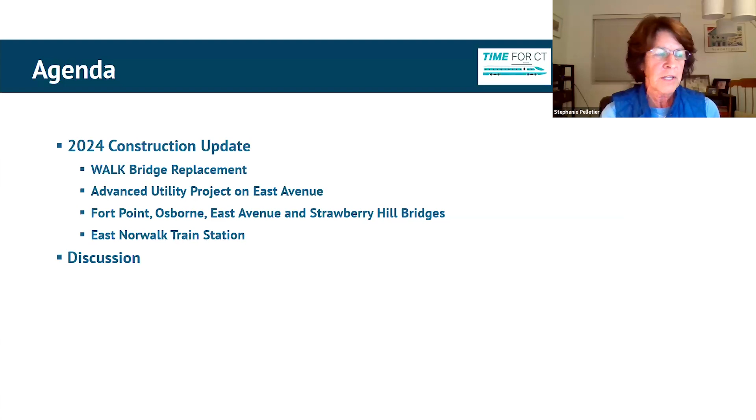So we'll jump right in and talk about our agenda tonight. We're going to talk a bit about the Walk Bridge, our hero project spanning the Norwalk River - the major railroad bridge replacement project. Then we'll touch on things in East Norwalk important to your group tonight, including status on the advanced utility project on East Avenue, progress on the bridges at Fort Point, Osborne Avenue, East Avenue, and the Strawberry Hill Avenue railroad bridges, the attendant roadway work beneath those bridges, and an update on the East Norwalk train station, which is undergoing a major renovation and replacement. Then we'll open up for discussion.

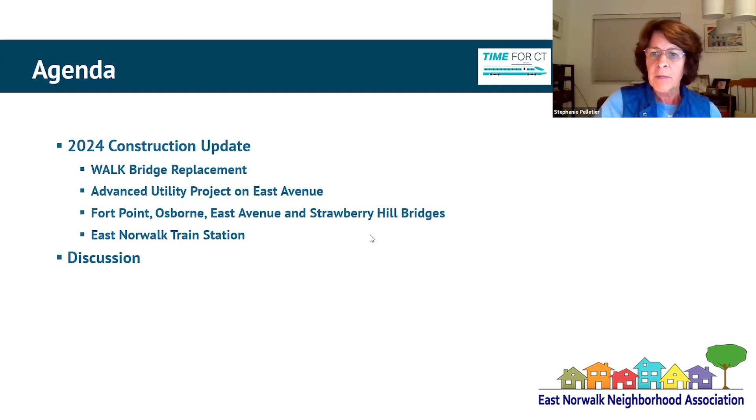Hold your questions if you don't mind, and we can get right into the presentation with Jeff Bird, who's going to take us through an update on the Walk Bridge. Thank you very much, Stephanie, and thank you, East Norwalk Neighborhood Association, for inviting us and allowing us to share an update with the community. This isn't necessarily the meat and potatoes of this particular meeting, but I'd love to give a brief update on the overall replacement project of the Walk Bridge.

As you can see, we have some very recent photos. Work is ongoing in all four corners, basically, of the bridge itself. The nice pictures to the right are taken from the bottom of some of our secant pits - basically, we're tunneling underneath the bridge to relocate some of the overhead wires that are on those high towers you can see on the left. That work is ongoing - the pits have been constructed, and we are currently drilling, or tunneling, underneath the river. Hopefully this week we'll actually place concrete in our first production drill shaft for the new bridge.

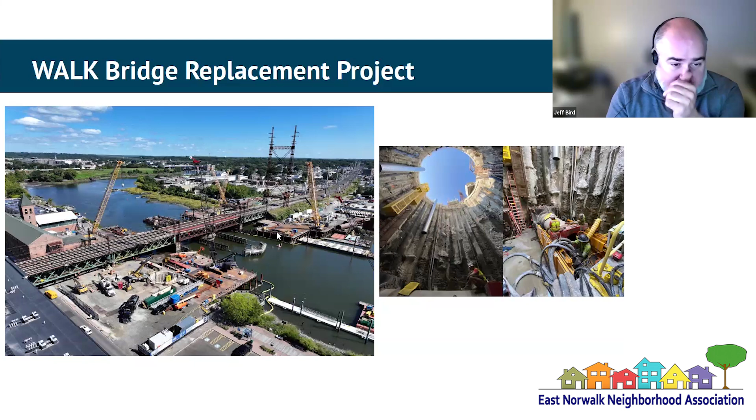So that's exciting - if you could pop to the next screen, Steph. You've probably seen this, but this is a quick, high-level update of where we're at in the overall life of the Walk Bridge project. Obviously we're in 2024, and we are continuing the microtunneling. We are constructing the piers, the substructure of the new bridge, as well as mobilizing and preparing at the Manresa site down on Manresa Island. Next year will pretty much be a continuation of what we're working on right now. I know we're not taking questions at this time, but if you do have any, you know where to reach us.

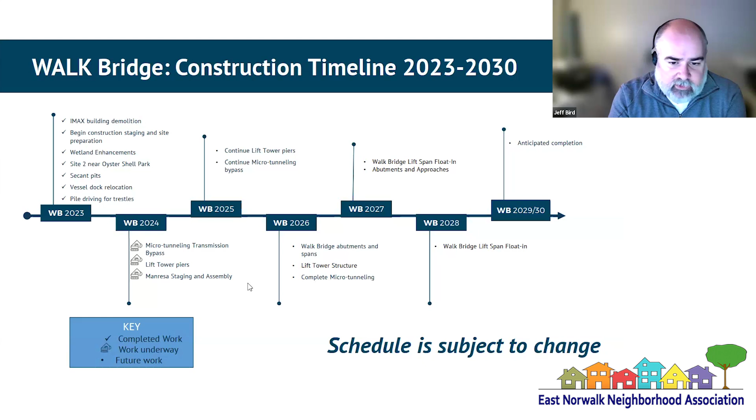And I believe at this point, I'll be turning it over to Emilio to talk about the Advanced Utility Project.

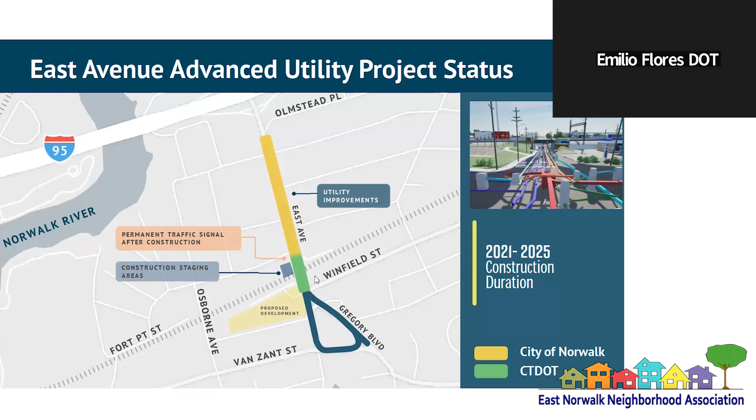Speaking to the detours, Frontier is actually going to be closing the section of East Ave between Fort Point and Winfield from the 2nd to the 12th. We are going to use a detour that we've utilized several times in the past with minimal impact. The station will remain open and pedestrian service will be maintained.

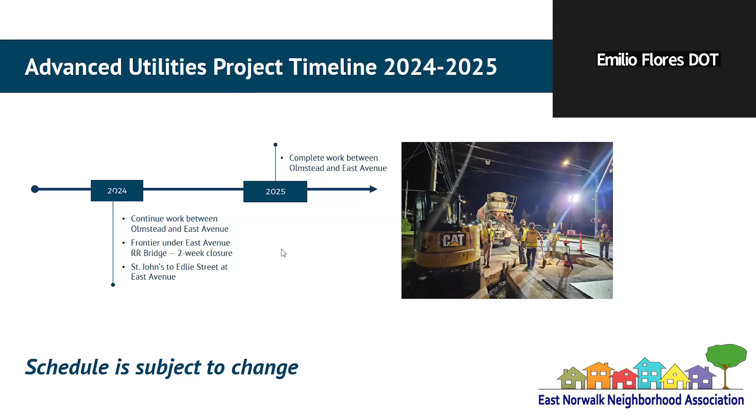In response to some of the residents' concerns, we will be minimizing our use of full closures at night, and we're going to start using alternating one-way traffic. You guys may have already seen the impacts of that, but please, we're welcome to your feedback on how that's working out. Just one of the ways in which we respond to your concerns.

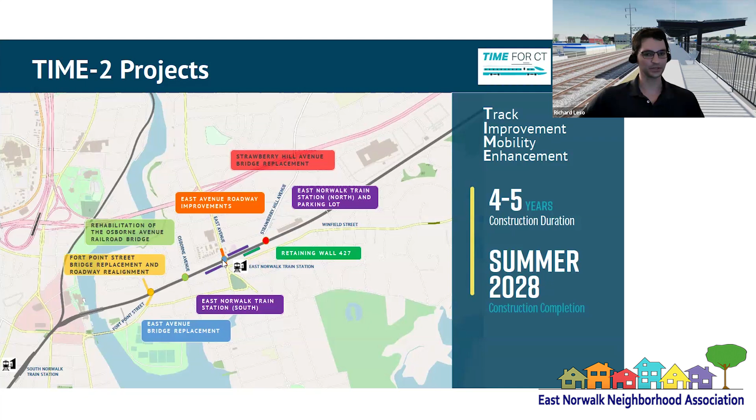So to date, we've accomplished the demolition of the north half of the railroad bridge over Osborne Avenue, and we've also demolished the north half of the railroad bridge over East Avenue. You've probably noticed we've also demolished the north platform at East Norwalk Station.

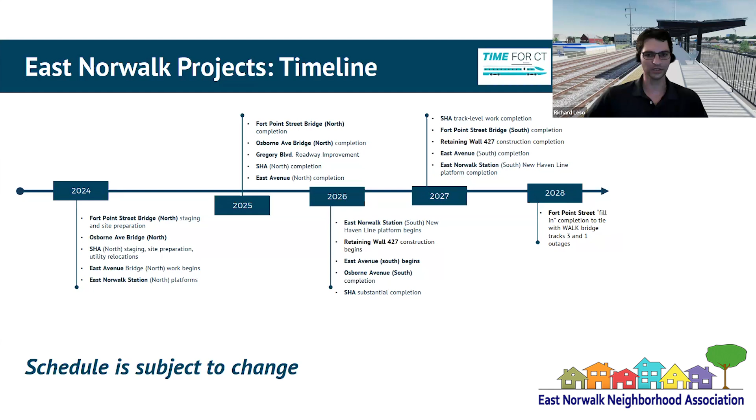On that note, we sincerely appreciate the community's patience as we did that. It took a lot of effort and coordination to ensure that we could get the proposed work completed in a tight 3-week closure window. The team here takes a lot of pride in the fact that we're able to accomplish that, and we really hope that some of the efforts we implemented during that 3-week closure helped alleviate some of the impacts to the public, such as the commuter shuttle.

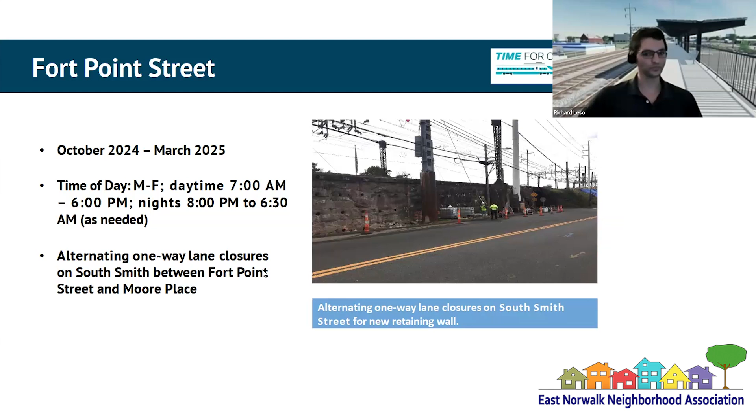So as promised, now I'll get into some of the work occurring at each of the locations in the next year or so. If you're subscribed to our construction alerts, you may have observed traffic impacts on the north side of the railroad bridge over Fort Point Street, with alternating one-way closures at night. These are expected to continue through early 2025, related to construction of the new bridge over the rail and Fort Point Street. Later in 2025, around May, there will be more nighttime closures for underground utility work at that location. We can move on to Osborne.

You've likely noted that Osborne Avenue under the railroad bridge is currently closed to vehicular traffic. That closure is expected to remain until spring of 2025, at which point it will reopen. It's expected to close again in spring of 2026 to allow for replacement of the south side of the bridge. The second closure is expected to be shorter, lasting about 5 months. During all these closures, property access and safe passage of pedestrians is maintained via our pedestrian enclosure, pictured here on screen.

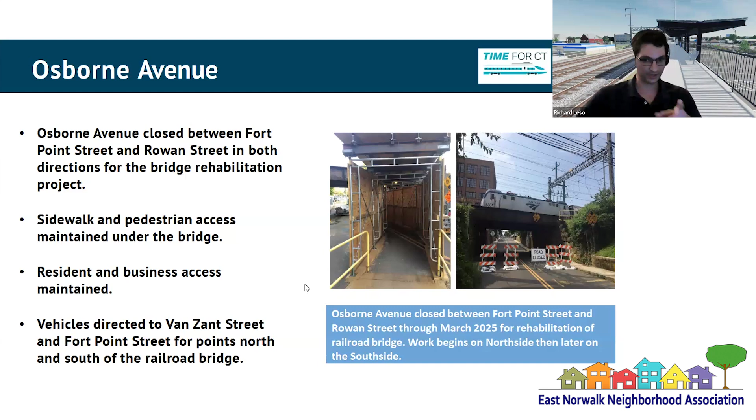Moving on to Strawberry Hill Avenue. The closure of Strawberry Hill Avenue under the railroad bridge was approved at the Norwalk Traffic Authority's September 16th meeting. We have 2 closures planned. The first will begin in January and last until fall of 2025. The second closure is expected in summer of 2026. Just like at Osborne Avenue, the first closure will replace the north half of the bridge, and the second closure in summer 2026 will replace the south half.

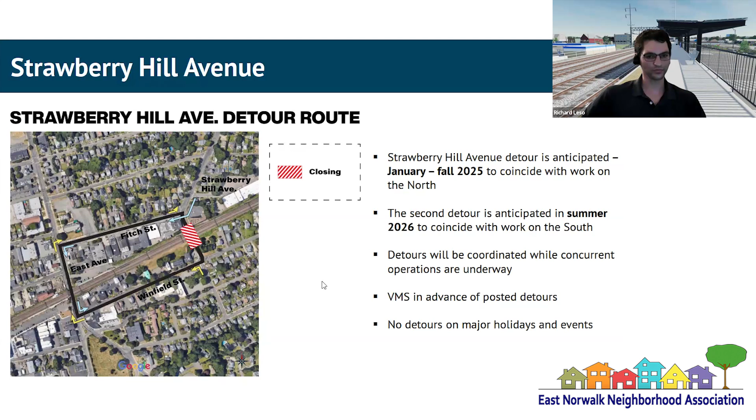Moving on to East Norwalk Station, as mentioned previously, we've demolished the north platform and set up the construction staging area. Some existing parking stalls at the station are currently being utilized for construction. Commuters are directed to park at the additional parking lot constructed at 180 East Avenue. At this point, we've completed 2 of the anticipated 4 total 3-week closures at East Norwalk Station.

The next 3-week closure is scheduled for fall of 2025. Upon completion of that closure, the new platform is expected to be open to the public. Then we'll have one final 3-week closure scheduled in 2027. We expect the inconvenience mitigated as it was during the first 2 closures, so at this time, we fully expect to continue our partnership with the city and continue running the commuter shuttle.

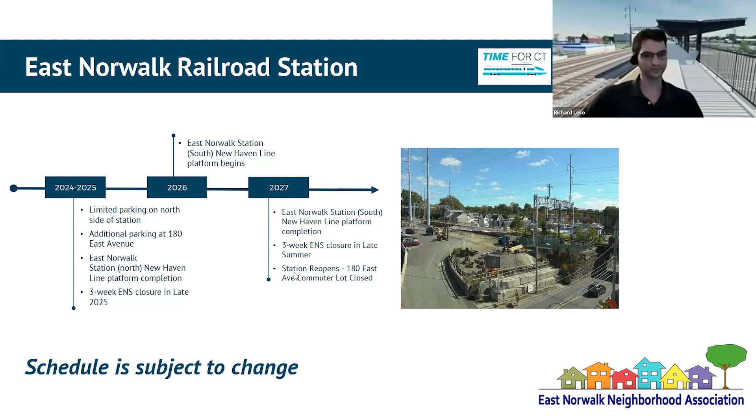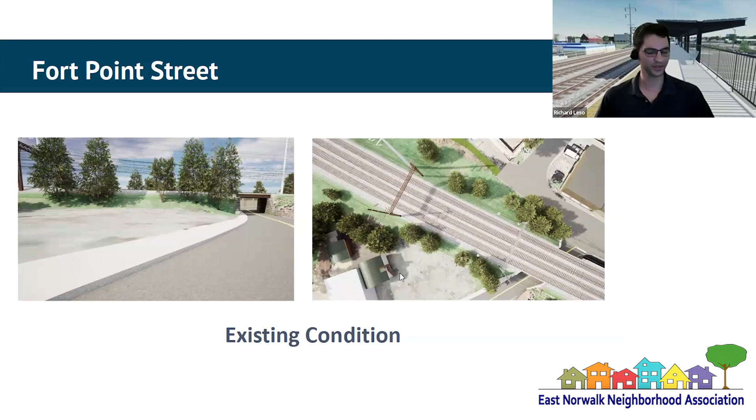And then I see here we've added some before and after renderings created for the project. Here you see Fort Point Street. We have the existing condition, which you've all grown very familiar with. When we're completed, Fort Point Street will be realigned and widened. The existing bridge will be relocated - I'm sorry, the proposed bridge will be relocated to the west of the existing bridge, such that it will align with South Smith Street.

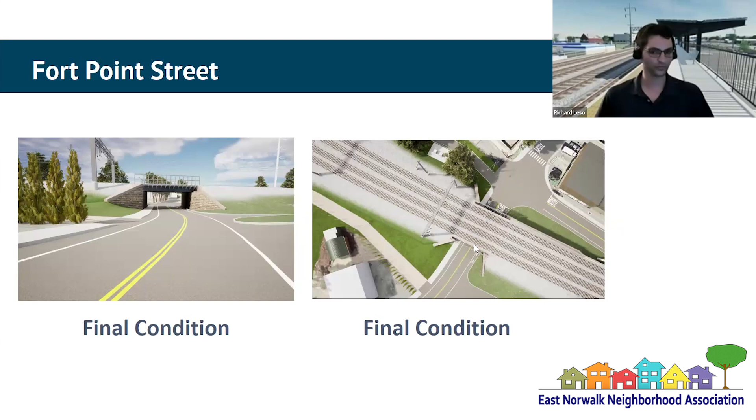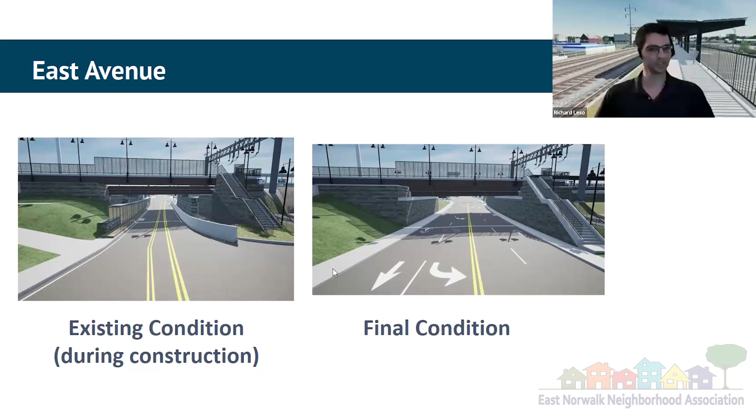And here you see our existing condition at East Avenue, juxtaposed with our final condition at East Avenue. You'll notice the roadway is widened to the station platforms. It's improved. And then you'll see some of our final East Avenue roadway improvements, what we expect it to look like at the end of our project.

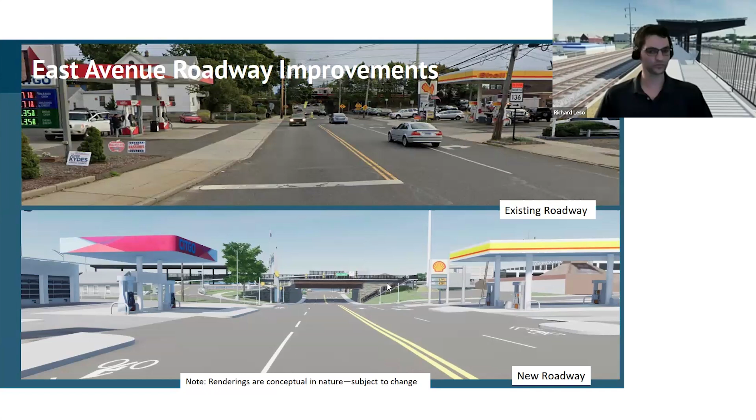And some more photos for the East Avenue Bridge, which was pictured in the East Norwalk station rendering. Here you see our final condition at East Avenue. Again, the street will be widened, with better accommodations for bicycle traffic and pedestrians, with sidewalks on each side of the bridge. Each sidewalk will be wider than the existing sidewalk.

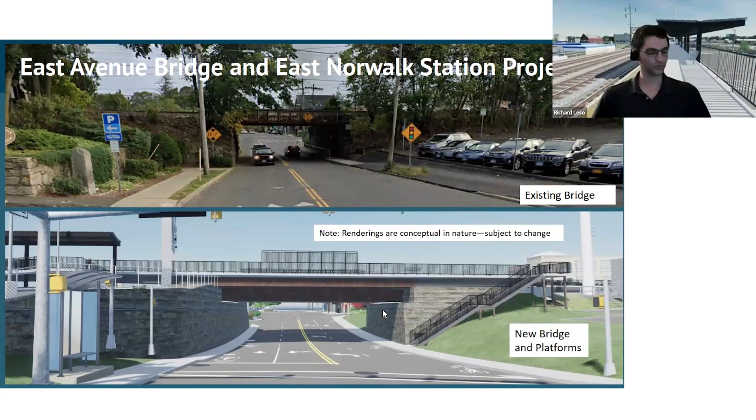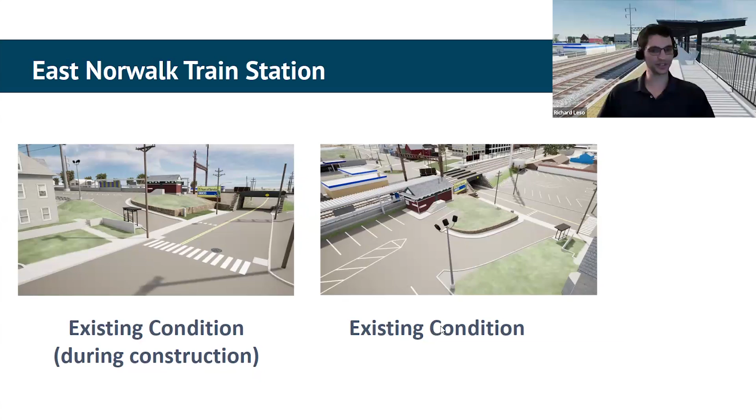And some more renderings for East Norwalk train station. You see our existing condition, which again you all know very well, and the proposed final condition. You'll notice on the north side of the platform we have what I believe we call the kiss and wave lane, a good place to drop off passengers. You see our improved ADA accommodations, with ADA compliant ramps. The new platform will be heated, and the covering over the platform is increased to keep passengers out of the rain.

And again, some more photographs of the final condition.

With the platforms being longer as well to accommodate platforming of the train cars. Good point, Stephanie. It's an existing 4-car platform to be increased to a 6-car platform.

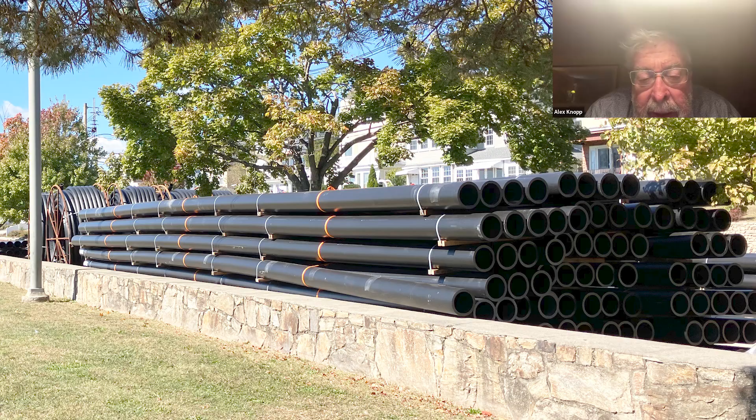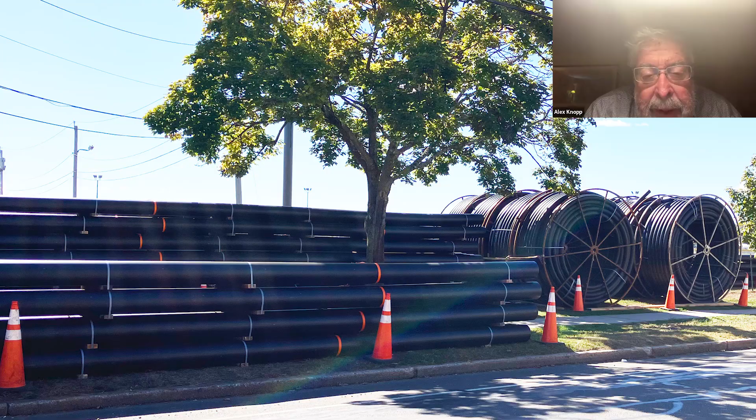One of the problems we have in East Norwalk is that there's a lot of work going on and very few entrance, access, and exit points. Could you discuss your coordination with the city, DPW, and other departments to make sure that the routes you leave open aren't being closed at the same time by projects from other departments in the city? I'm particularly concerned about the sewer project on Seaview Avenue. If you drive on Seaview now, you'll see the entire length of it has a series of plastic tubes and pipes along the whole length of Vets Park. So when those start being installed, what happens to overall traffic mobility within East Norwalk from the impact of all these projects being done simultaneously?

And I'll add to RJ, could you address in the same thing too, the issue of Eversource utility, because I know that's not part of your project, but it's also impacting Seaview. So maybe get both of those.

Let's talk about the coordination with the city. RJ or Amelia, do you want to chime in on that? Sure, I can touch on that. We meet with the city weekly at a minimum. We discuss the traffic impacts, the proposed detours. All of our detour plans are reviewed by the city. And we meet with them weekly where we discuss other projects that may not be on our radar, projects that aren't administered by us, city projects.

Like I heard you reference a sewer project, I can't comment specifically on that because we're not involved with it, but the city does oversee all the closures, and their goal, not to speak for the city, is to ensure mobility through East Norwalk despite all the construction work happening. I have to say, as former mayor of Norwalk, I'm not satisfied that mobility is being maintained. The same thing happened when the bridge burned and collapsed over I-95 - the rerouting of traffic after that first day was horrible.

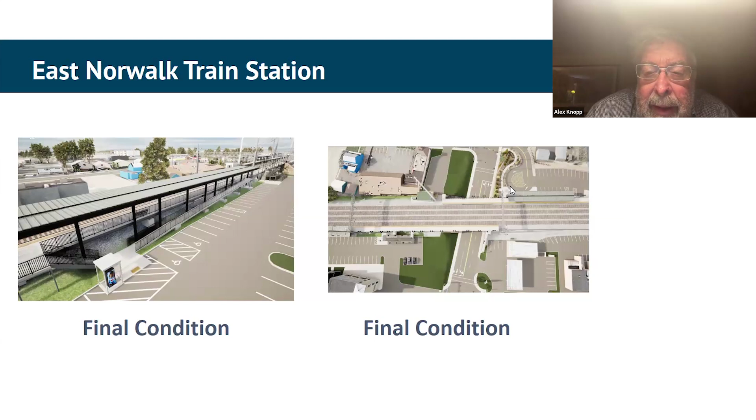Now, my second question is, will there be a realignment between the exit from the East Norwalk station and the temporary construction lot that you have on the other side of East Avenue? When I was mayor, we had talked about trying to align Fort Point and the exit from the East Norwalk station, perhaps with a light, to make sure there wasn't this odd jiggering going on. Could you discuss that, please?

Amelia, do you want to take this one? That work is happening under Amelia's project, under the purview of the Advanced Utility Project, Mr. Knopp. And we stole your idea. We are, in fact, aligning Fort Point with the entrance to what used to be the White House there that's owned by TTD.

So that driveway will come out through there. And not only will there be signalization there, that signalization will work in conjunction with the other signals on Fort Point, acting as one big computer, one big traffic analysis as the cars are coming and going through that intersection. No, that's great to hear.

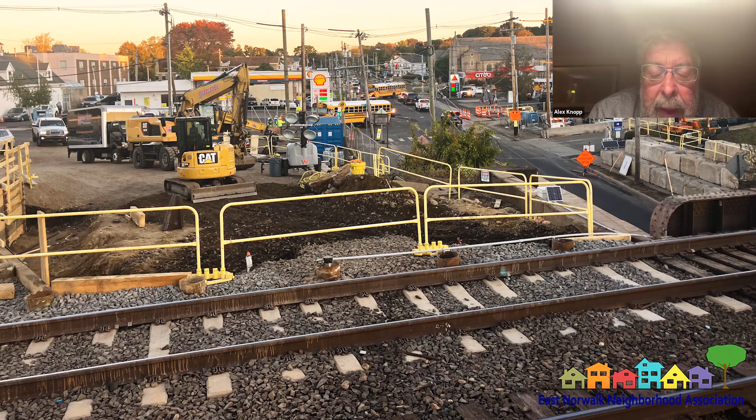Great. Significant improvement. And my last question is, what's going to be the long-term use of the temporary construction lot that you have at the East Avenue Bridge on the north side?

Commuter parking, I believe. Yes. Right. Yep. Will it be part of the East Norwalk train parking lot kind of complex? That's my understanding right now. I can't speak to whether that's finalized. That's our intention at this point in time.

Good, thank you. Thanks very much. Thank you, Diane. Welcome. Thanks, Alex. Then to chat. Okay, Charles? Yes, Becca had a few questions in there, but it's best she speaks to them herself because she had more questions to ask. So I'm going to ask her to unmute. Hi, Becca. Hi.

My first question actually dovetails pretty well with Mr. Knopp's, because I'm wondering the same thing about how the construction projects can better accommodate the continued flow of pedestrian and bicycle traffic. For example, on Seaview, where Mr. Knopp mentioned, it's really treacherous coming over the drawbridge right now with the bike lane shift when there's that big hole in the ground. I mentioned specifically in the chat that walking that temporary sidewalk or protected sidewalk under the current East Avenue bridge is pretty treacherous at night during construction. As someone who frequently commutes off peak and arrives back after dark, that's a great concern to me because sometimes trains that arrive after midnight from New York come in on the northbound side, and those of us who live or park on the southbound side need to get back over there safely.

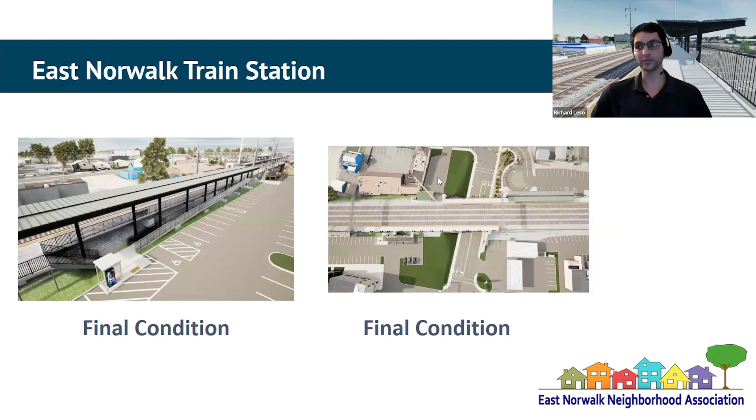So for your first question, for a dedicated bike lane, no. You probably noticed in the rendering there are proposed sharrows. As a result, primarily of widening the roads, the bicycle safety is improved. We don't have dedicated bicycle lanes in that location. You probably saw the sharrows, I think that's what you're referencing.

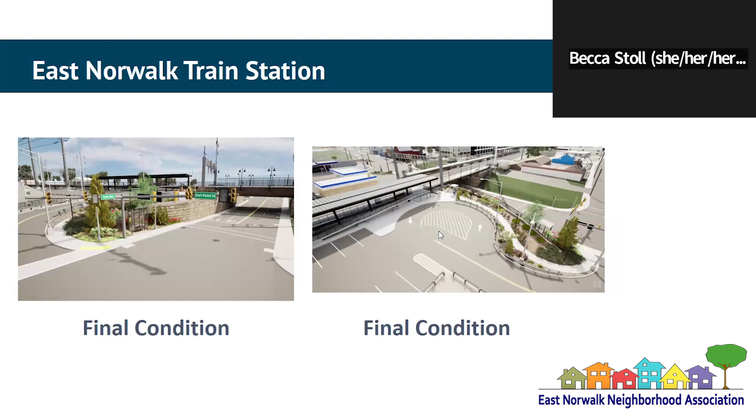It is. I would like to really encourage you to reconsider that, because if you're adding two lanes of vehicle traffic, that's going to encourage higher vehicle speed and actually not go with this complete streets vibe that Norwalk's going for. There's definitely room in the new design for a bike lane, and if you're going to be encouraging more people to walk and bike to the train station, I think that's worth looking into. Okay, yeah, well taken.

Let me discuss with our designers. I'm not involved with the design, but I'll discuss with our designers and see some of the considerations, and see if that's something that would be possible. Great, I mean I think it ties in nicely. There's this whole East Avenue corridor study going on about how we make it safer and more multimodal, and this dovetails into that. And then my last question was, where's the bus going to stop?

I think, right here, whoever pulled this up, thank you, Stephanie probably. You can probably see our bus shelter right at the station here. So it'll still be on the street, it's not going to pull in. There's that sort of island area so that there won't be people trying to go around it, hopefully. Right, it's going to be a dedicated separate bus shelter. That is super, thank you.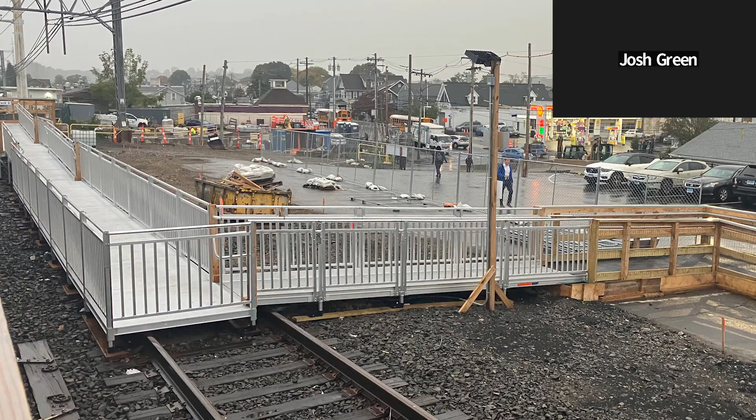My second question is also on the southbound side. The ramps to get to the platform, I think they're all ADA compliant. Is there a way to either convert one or add one that isn't? As a commuter sometimes running to catch a train pulling in, you're running through a zigzag maze to get to the platform. It would be much quicker for people who don't require ADA access to just go straight up 3 or 4 stairs, like the old station, instead of a long, velvet-ropey windy pathway - left, down 50 feet, right, down 50 feet, another 50 feet, then turn left to get to the train.

Thank you for your question. I think the answer to your first and second questions are very similar. For the cars turning around, the fence is in that location because we're constructing our permanent platform right there, up against the fence. What we can do is see if the contractor can pull that fence back a few feet, but the contractor is constructing foundations on the other side of that fence for the proposed platform. We'll look at the proposed work in that location to make sure it won't conflict.

To answer your second question about the ramps, you're exactly right - they are the way they are to be ADA compliant. Their location was carefully planned to not interfere with the proposed construction, so we can build the permanent platform around the ramps. I appreciate that they're not the most convenient, especially for commuters in a rush. It would be very difficult to put a staircase in without conflicting with one of the proposed foundations. I don't think it's going to be possible over there, but we may have better luck when we build the temporary platform on the other side - we may be able to accommodate a staircase in that location. I will do my due diligence and look into it.

Okay, thank you. And for the drop-off part - since you have this slide up showing the new proposal when it's done, with that wave-goodbye area - I know it's hard, but is there a way to maybe paint some lines or do something to give cars that are just dropping people off a pattern or rhythm? Right now during peak hours it's a complete free-for-all with no one monitoring who's coming in, who's going out, who's pulling a U-turn where, and you end up with a sea of cars at weird angles trying to figure out how to maneuver in and out.

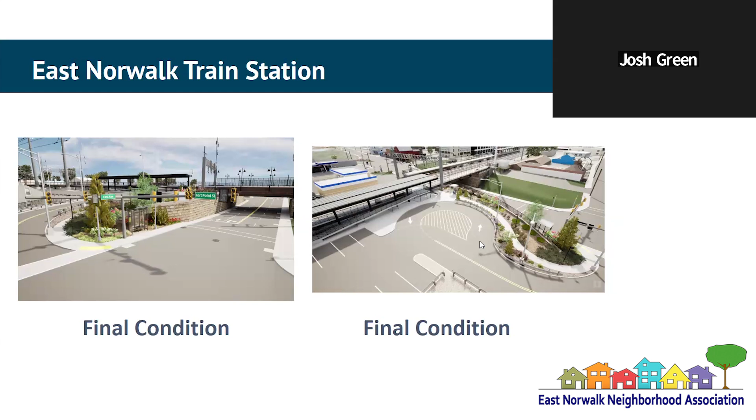For what it's worth, there is a method to the work madness. We're dealing with track outages planned years in advance with Metro North to conduct work needed at the track level. This is required to keep trains continuously running, including Amtrak and freight trains, in addition to Metro North trains. You've probably seen the tracks are missing over the Osborne Avenue Bridge on the westbound side, and you've seen us switch trains entering East Norwalk station coming from New Haven, using an interlocking we spent a couple of years preparing so we could switch tracks while these tracks are taken out of service.

Short of an engineering class on how we build a railroad and replace railroad bridges — they're different from roadway bridges, different from a fixed bridge like the Yankee Doodle Bridge, and different from the roadway movable bridge like the Stroffolino — we're dealing with a lot of different bridges, discovering things that were there from the 1890s when they were built, and learning the safest way to proceed with this massive construction project. So again, the feedback is key.

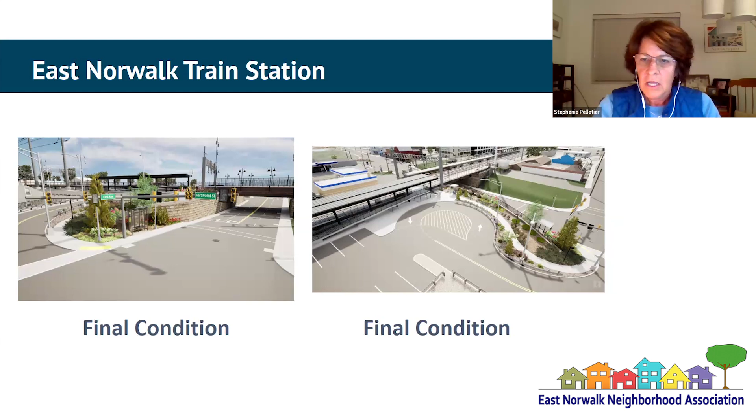Are there any other questions?

Can I add one thing? I really love to hear the feedback, it's great to hear. The one thing that's difficult is for me to give you an answer we can definitely fix right here in this forum — it's difficult because I really need to consult my team of engineers to do that. The best way to provide feedback is by sending an email to the Welcome Center with Stephanie, because that email will find its way to my desk and I'll be able to properly evaluate it. So I'm noting everything you guys are telling me, and they all sound like great ideas and things we can improve upon. The best way to really give us your feedback is to send us an email. I promise you an engineer will review your request.

Thank you for that. And just to remind folks, it's info@walkbridgect.com, and they are very responsive. So it's a good point — for everything, even what you're bringing up here, follow up with an actual email, just so there's a record of it and they can prioritize these things.

I think we have a couple more chat comments. Charles, I don't know if there are other hands raised.

Could I just ask one or two of my own, in regard — since we had Josh's comments about the station — is there any reason why there's no protection for riders for the upcoming cold weather, as far as snow protection or rain protection? There's no covered areas on that platform.

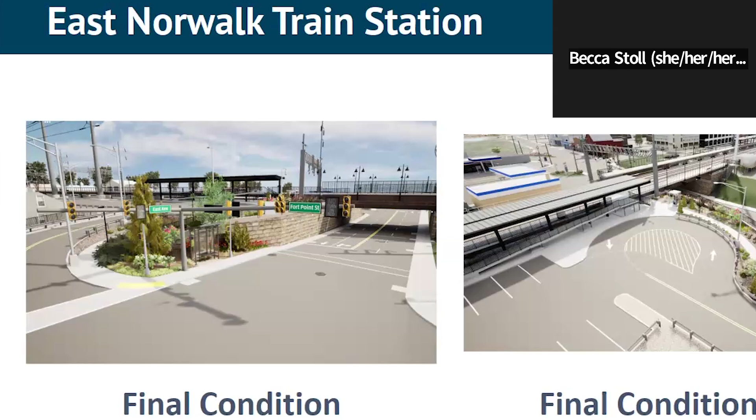These are renderings, and that'll be nice too, because right now it's really treacherous crossing that point you were just mousing over, because the place where pedestrians want to cross isn't where the crosswalk is, and cars don't know to stop. This signal stuff is going to make a world of difference. It's appreciated. Agreed, I cross there regularly to perform work at the station - it's a treacherous crossing, even in my reflective gear.

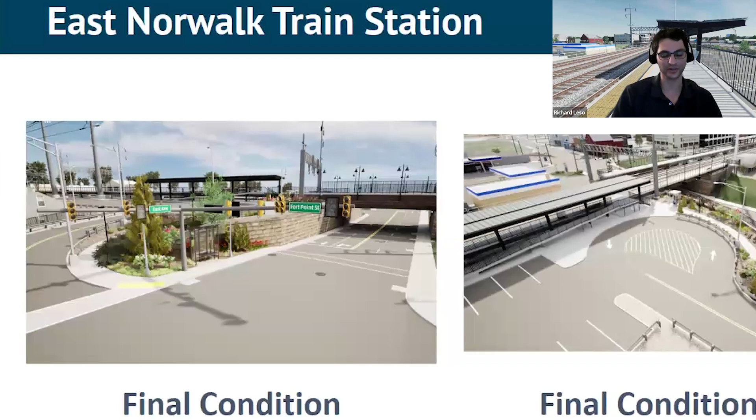I think we have time for one more question. I hope you can stay on for a couple more people to raise their hands. Stephanie, I really appreciate it because we don't meet that often, but I just want to be mindful of our time here, Diane. I'm going to ask - okay, thank you. Two of my dumb questions.

So whatever became of the proposed elevator, and also the original plans were looking to have pedestrian crossovers where you didn't have to cross East Avenue. So did those just never make the final cut, or were they in there and came out, because every time we're seeing something it's conceptual. So why are we still having to come down and cross East Avenue to go northbound or southbound? And where is there still an elevator, or is that now gone?

So the proposed platform does go over East Avenue, and there are stairs on each side of East Avenue. So you have your crosswalk here, and you can also use the platform to get over East Avenue. As far as the proposed elevator, that's part of the TOD agreement, which is currently ongoing. I have no direct involvement with the TOD agreement whatsoever - I'm a construction engineer, so I'm not involved in planning or design. I can tell you what I know: the last I've heard is that negotiations are ongoing with the developer.

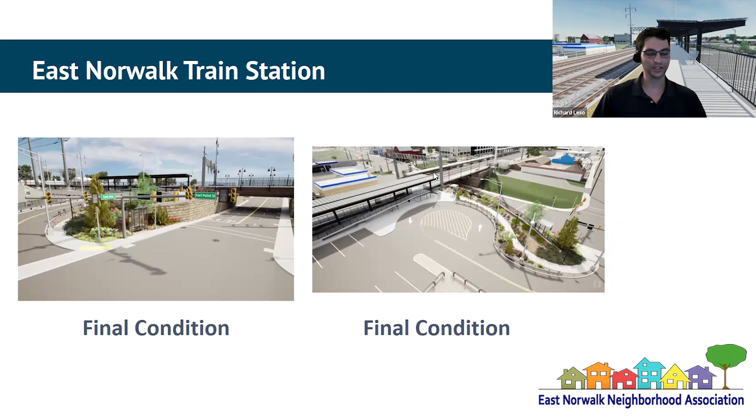So the elevator is still linked to the developer from 230 East Avenue, which is also the other question, because part of that agreement was to have a kind of station shop on that side, a freestanding building for newspapers or coffee or something, and that hasn't seemed to materialize in a near time frame. So I guess that's part of the TOD negotiation as well.

But my other dumb question - no such thing - where is the station on the southbound side of the new station? Is there not an actual physical structure like the red house? This is my dumb, I'm not a commuter, question, but why don't we have a station house?

It's not part of the design, but there are ticket kiosks - the pay stations. Those are exposed on the platform. We'll have ticket vending machines on the platform, yes.

On the uncovered platform, so there's no shelter and no station house? There will be canopies - go ahead, RJ. Yeah, the proposed platform does have canopies, in the final configuration, yes. You can see that, Diane, on both renderings.

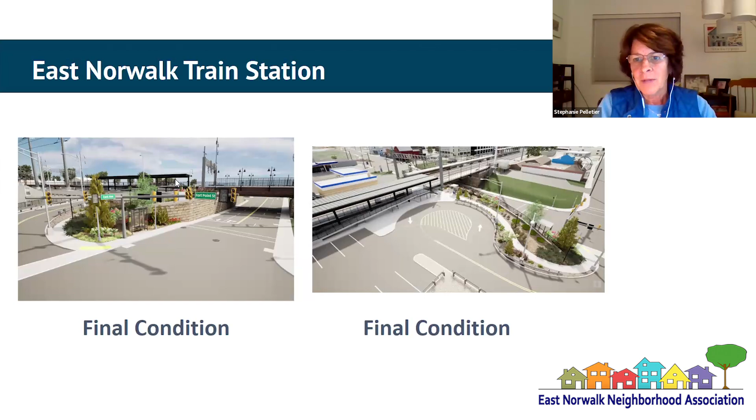If folks think of something afterwards, or have something now, you can send it into ENNA, but the quickest response is going to be communicating directly with Walkbridge. The site is walkbridgect.com, and the email is info@walkbridgect, to get your questions in directly to those folks.